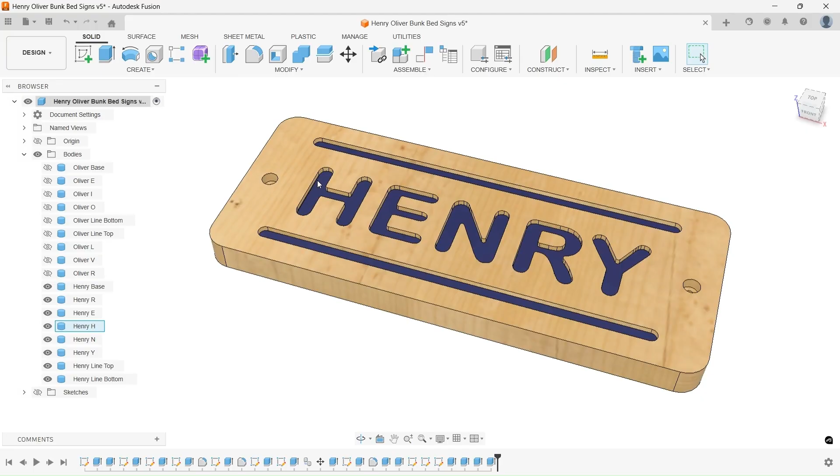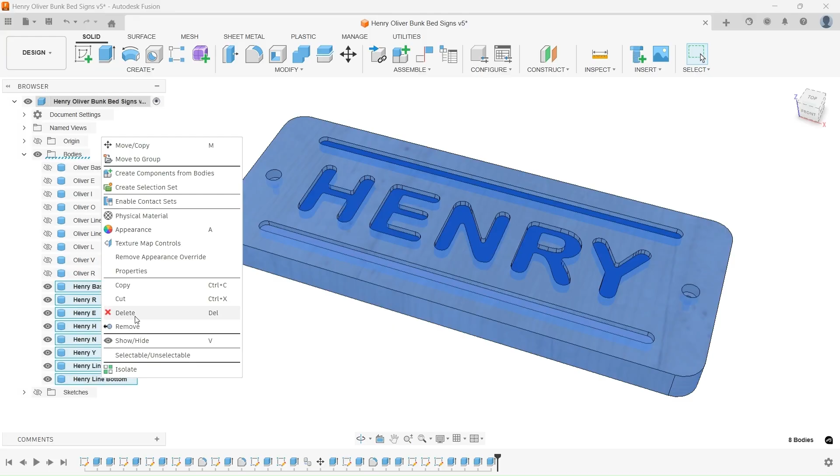Okay, here's the name sign for Henry. It's made out of fine grain pine wood, 4.5 by 10 inches and 3/4 of an inch thick. The letters are CNC milled out, and then this is not painted. These are acrylic pieces cut out on my laser cutter and then painted in blue for Henry, and for Oliver the same is true in red.

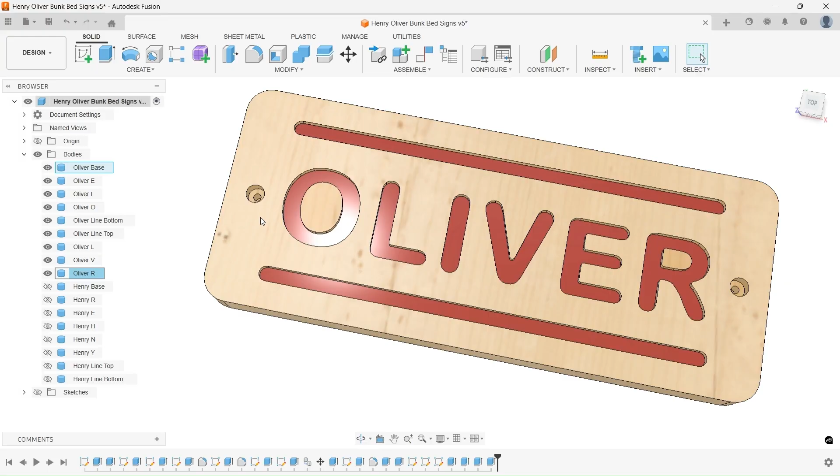Here we go. So all this is CNC'd out. Then we have two mounting holes. I did not drill them all the way through for one reason. If I drill them all the way through, then I need a spoil board underneath here. I didn't want to do that.

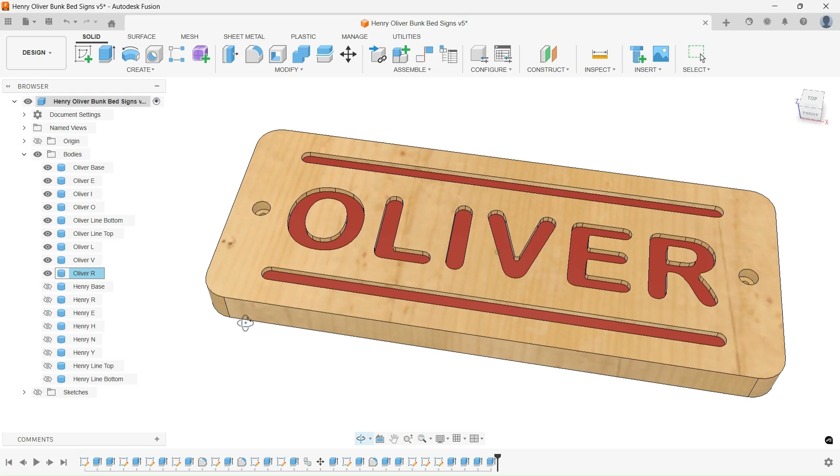Same thing is true for the edges. The stock here has, of course, a 90-degree edge, and I could CNC that, but then I cannot hold the stock from the side, and the effort to hold it from underneath is just too much. So what I did is I just machined that on my band sander. That takes a few seconds, much easier than going through the whole work holding process.

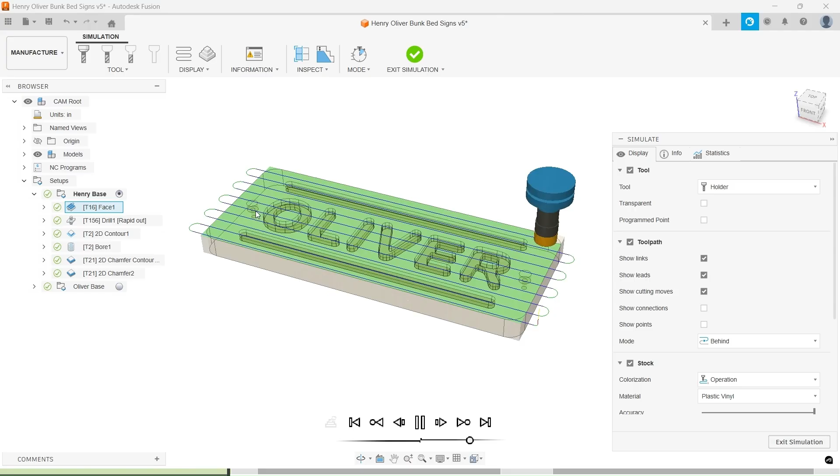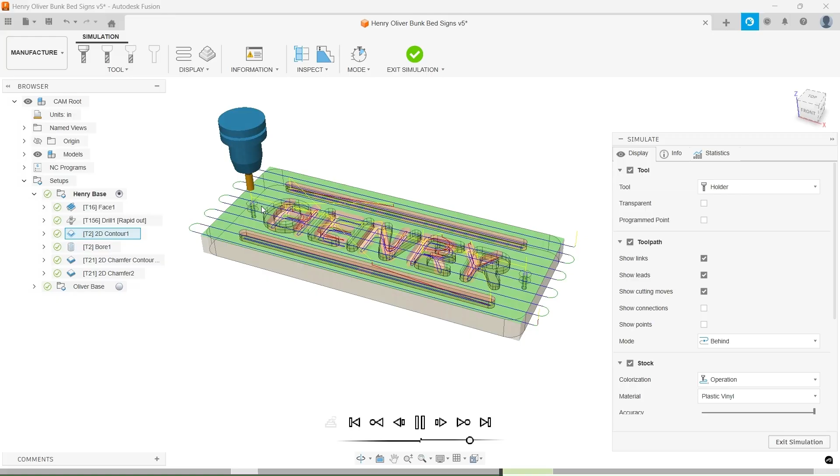Okay, here's a quick CNC simulation. First, we face off the stock, give it a smooth surface. Then we drill the two holes. Then we carve out the letters. And the two lines. And we countersink these holes.

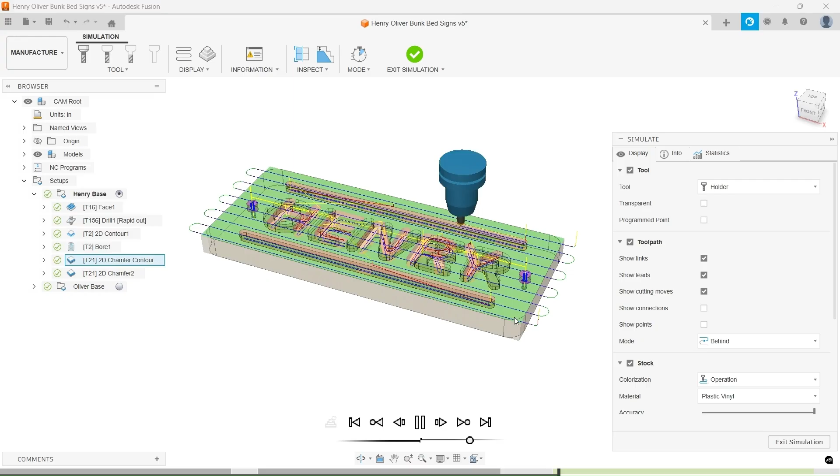The simulation is a little bit jumpy. My computer running Clipchamp and Fusion at the same time is putting some strain on the performance. And finally, we chamfer everything. And I also chamfer here these round edges. That gives me the contour for my belt sander.